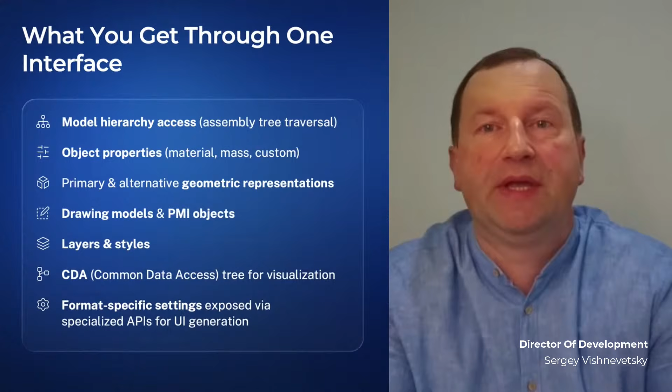Since Common API is designed for rapid solution development, even the list of supported formats and file extensions is exposed through a dedicated class. This allows creating a file open dialog with code. What you get through one interface: across different formats, it gives you model hierarchy access, object properties, primary and alternative geometric representation, drawing models and PMI objects, layers and styles, format-specific settings, exposed via specialized APIs suitable for UI generation.

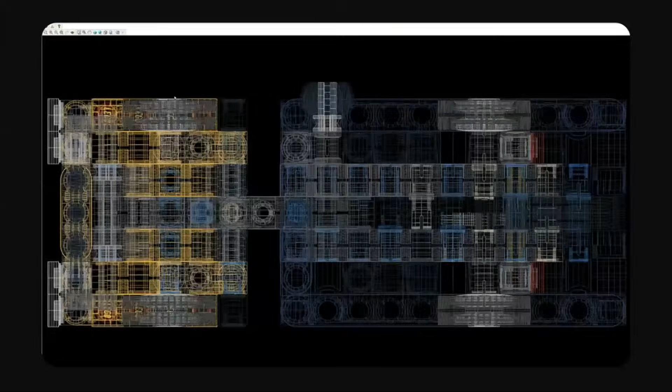Now let's move to a demo where we'll open multiple formats in the ODA example application. In this video, we demonstrate the capabilities of our unified MCAD Common API, which acts as a wrapper for different native SDKs and enables seamless work with a wide range of formats within a single environment. First, we loaded a STEP file powered by ODA SDK. Now we see an IGES model based on the IGES SDK and wrapped with the same MCAD Common API class.

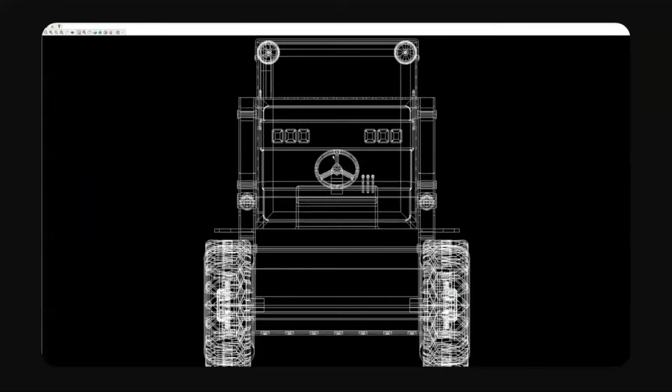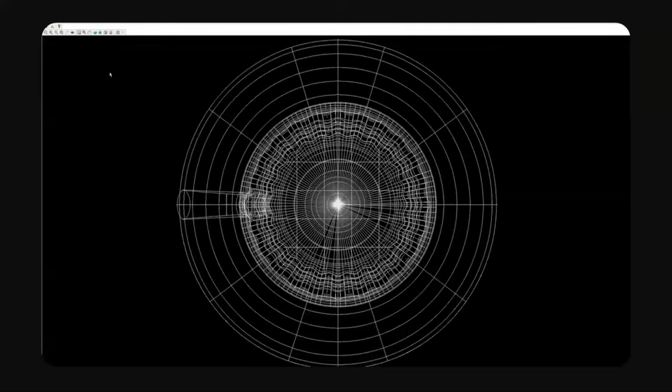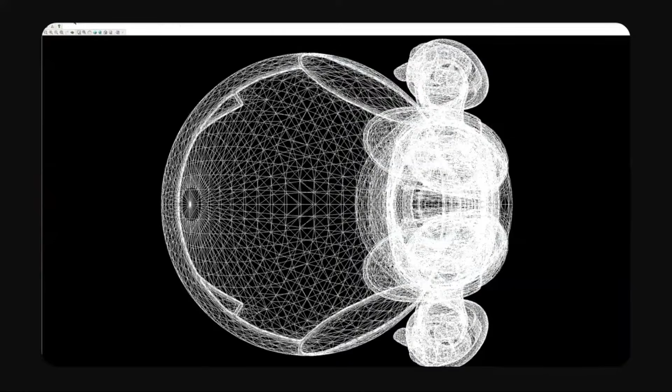For this format, the hierarchy is more detailed. In addition to the mesh 3D model, we see PMI visualization. Next is the JT format, a binary format from Siemens. We are also going to see here the 3DM, the STL, a set of formats that are supported natively but via MCAD Common API. This sample application is available in the MCAD Common API release package. In addition, integration with Visualize SDK is supported through the MCAD to Visualize module, which is also provided as an example.

Another principle is native API for every format. This is the architectural principle that sets us apart from competitors. We do not force data into a single intermediate format. Each format lives in its own native database. A SolidWorks file stays as a SolidWorks database, Inventor as an Inventor database. This preserves the full accuracy of the original data: geometry, topology, parametrics. Each format-specific API exposes everything that exists in the native data.

SolidWorks configurations, display states, sheet metal, design tables, cut lists. Inventor document properties, assembly constraints, STEP AP242 PMI semantics, supplemental geometry, digital signatures, JT load management, tessellation levels. MCAD Common API provides unified model hierarchy access, object properties, primary and alternative geometric representation, drawing models, and PMI objects, layers and styles. Format-specific settings are exposed via specialized APIs suitable for UI generation. Common API is for breadth when you need one code for all formats. Native API is for depth when you need native-level control over one format. You choose what fits your task.

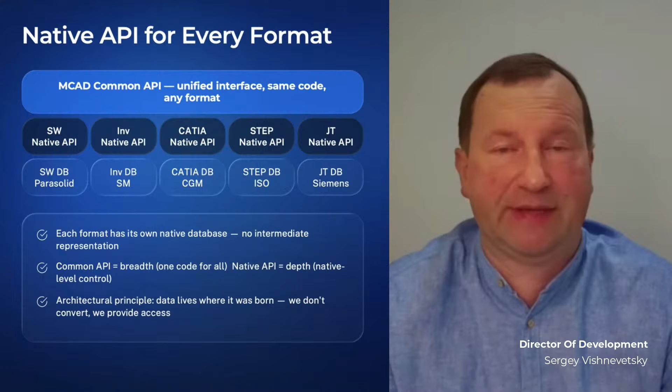Next one. A separate highlight is support for the external 3DM format based on the OpenNURBS Rhino library, integrated into MCAD Common API. This is our first experience integrating a non-ODA format, and it has proven successful. The format works fully through the Common API: model hierarchy, object properties, geometry access, and visualization. We can confidently say MCAD Common API is ready for virtually any MCAD mechanical CAD format.

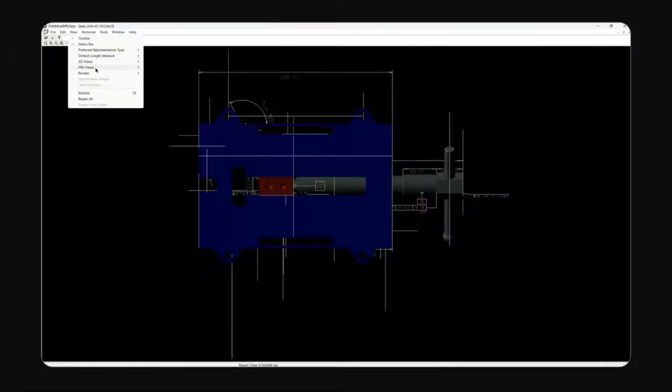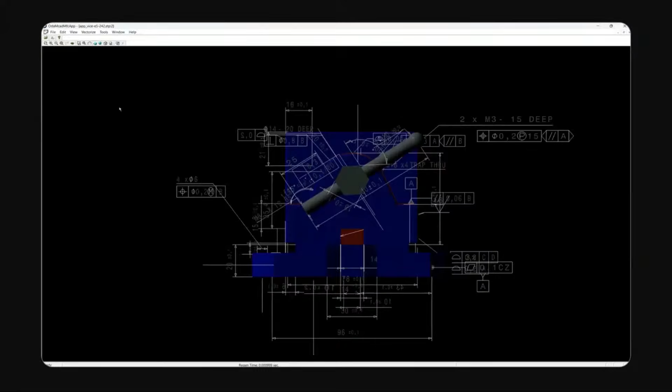Now we are moving to a really small demo where we open the STEP file and show the different views we can see here, and we are manipulating them via MCAD Common API, and we can see different views, and the files contain PMI. PMI is also supported via Common API.

Let's move to the next block. It's our SolidWorks support. SolidWorks SDK provides full native read and write access to SolidWorks parts, assemblies, and drawings. It's a production-ready library for data migration, custom viewers, and editing workflows. You can not only read, but also write back changes, update properties, relink assemblies, modify configurations, and save valid SolidWorks files. The key idea: you fully control the data layer on your own infrastructure.

We support SolidWorks from 2011 up to 2025 in one API. All geometry is native Parasolid BREP and can be extracted directly.

The SDK covers the full SolidWorks data stack across 10 core capability areas. First, we handle one foundational data layer. Our file input-output supports all three primary document types with stream-based processing for high performance. Beyond basic reading, you have deep access to configurations and the ability to perform operations on custom properties at every level. For structural data, the SDK enables complex assembly management, allowing you to traverse or link components dynamically.

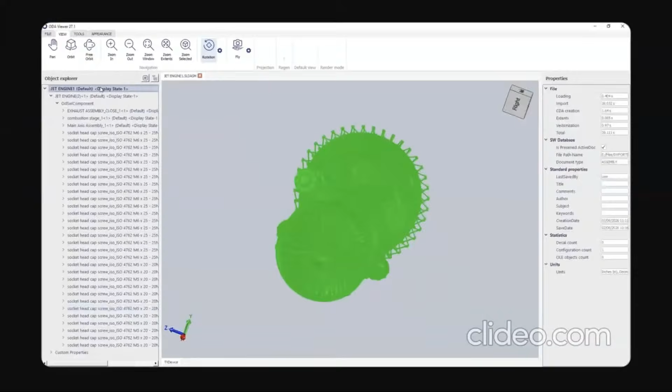For sheet metal workflows, we provide deep access to cut lists and properties: thickness, bend radius, K factor, materials, quantities, and dimensions. Everything needed for downstream manufacturing and ERP integration. Now let's move to our next demo. It's a complex turbine assembly. Let's look at this live demonstration of our SDK handling a complex turbine assembly.

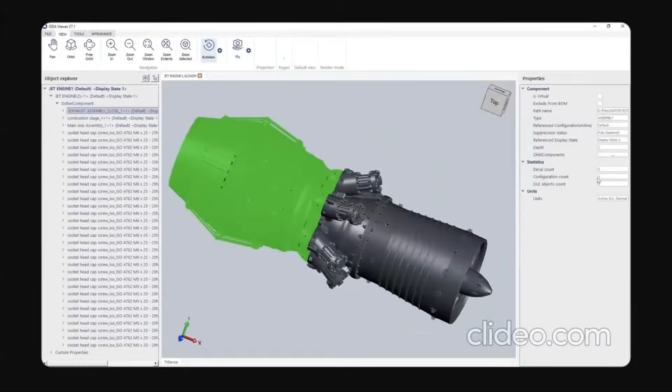As we navigate this 3D model, notice how the common data access tree on the left instantly indexes every component, subassembly and individual bolt. By selecting a component like the rear casing, the system immediately exposes its metadata, including file paths, creation dates, and unit systems directly from the underlying database.

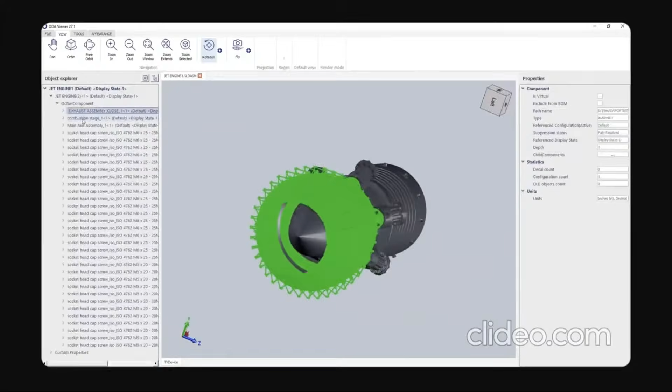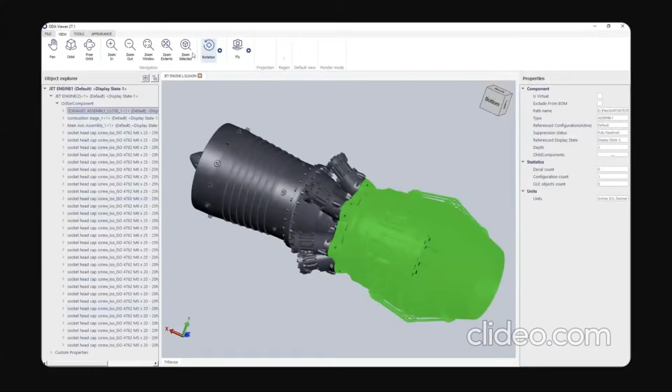You can see here as we toggle components between resolved and suppressed to isolate specific internal geometry for inspection. Observe the click-to-select synchronization. Selecting a part in the 3D view highlights its corresponding entry in the hierarchy. Even within deeply nested subassemblies, the SDK maintains full 4x4 transformation accuracy, ensuring every component is positioned precisely as intended in the original design.

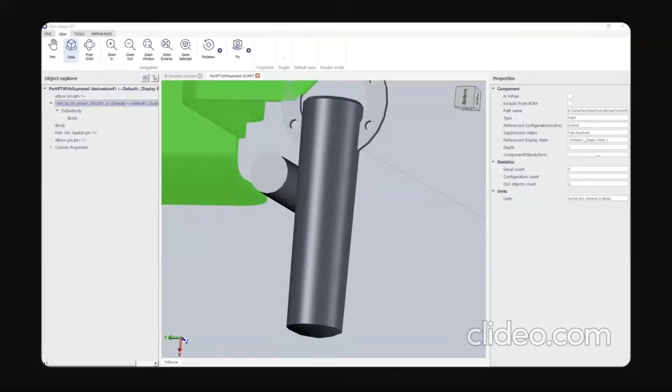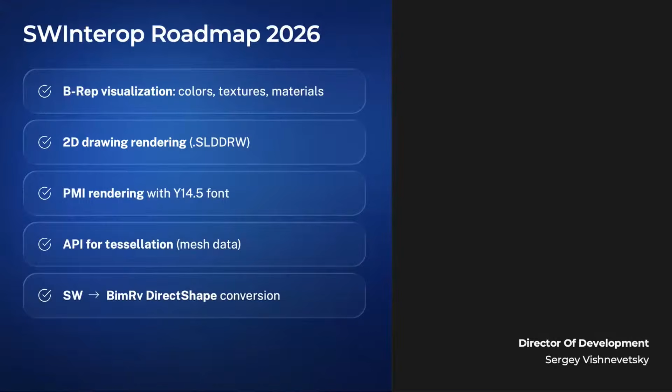Well, looking ahead, our 2026 roadmap is focused on deepening visual fidelity and expanding cross-platform interoperability. We are introducing full API access and rendering for BREP entities that includes support for colors, textures, and materials, ensuring the output matches the original design intent.

Future updates will include dedicated rendering for 2D drawing files and optional rendering of PMI symbols using the industry standard ASME Y14.5 font. To support high-performance graphics workflows, we are adding API access for tessellation mesh data.

The next SDK is Interop SDK that provides native access to Autodesk Inventor files. Currently, it supports reading Inventor file formats from 2022 up to 2026 versions, both for parts and assemblies and for drawings. The public API allows you to extract as-is 3D data from part files, get access to annotations, display lists, and standard and custom document properties. Visualization support is based on our ODA Visualize SDK.

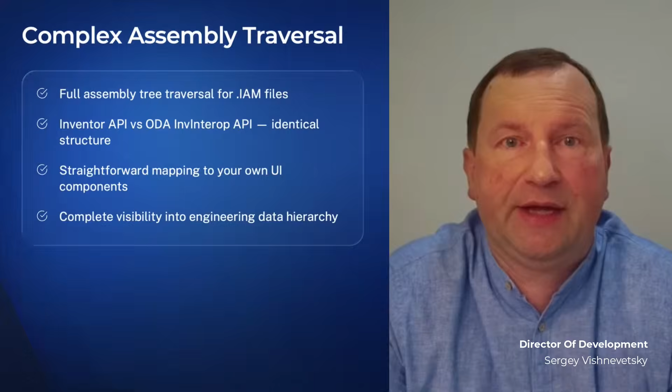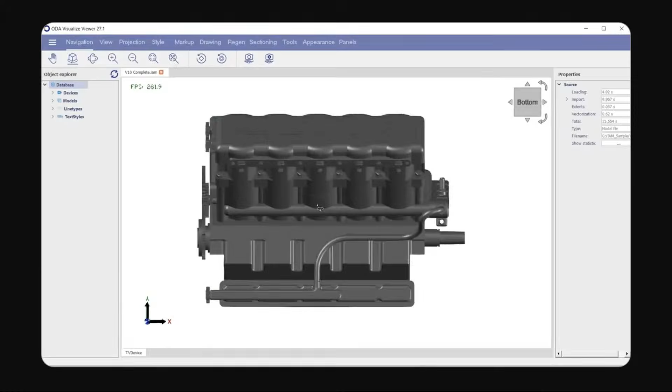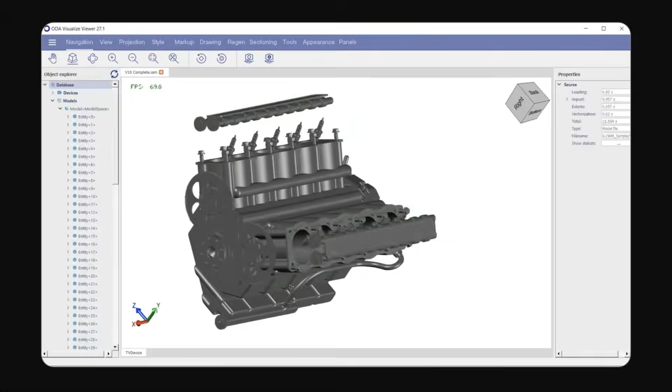Well, now let's move to the next demo. In this video you can see the V10 engine assembly file opened in the Visualize viewer. This assembly file consists of part files and other assembly files. In our sample application, in our Visualize viewer, you can see selection of different parts, isolation of different parts, and all abilities that we provide to work with Inventor.

In our next sample application named Inventor Document Properties, you can see the list of properties including material and mass of the part, last saved by, last saved date properties of the file, and others.

Well, our roadmap for this year for Inventor Interop includes visualization support for 2D IDW files, improvement in the public API for annotations, visualization improvements, extending the public API to traverse object collections and get properties, and unified CAD API integration.

Now let's move to the next block where we cover vendor-governed open formats. The first one is Siemens JT. For lightweight visualization standards, we support the JT exchange format developed by Siemens. We provide visualization of both 3D and 2D geometry. Recent versions added support for selected PMI types and text rendering.

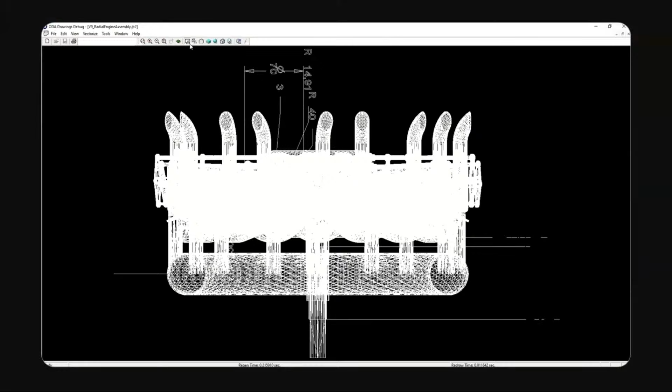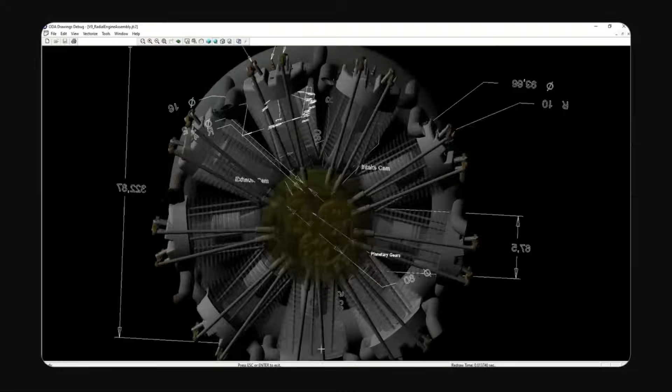Now we have a small demo application that illustrates JT visualization and PMI rendering for JT file. It's our debug application that uses our common Visualize SDK, and we see here both 3D data and PMI from JT file.

The next block that we have is the block of open standards. And the main one is definitely STEP, the industry exchange standard. Over time, our ODA STEP SDK has evolved into a mature and well-proven library used by our customers in their own software products. During several years of development, we have implemented a feature set sufficient to support STEP in a wide range of practical scenarios.

We continue to add new capabilities introduced into STEP through the activities of PDES as we actively participate in CAx implementers forum and closely follow all updates to the format. Our SDK supports all application protocol schemas, including AP 242, 214, including the recent 4th edition.

We support all currently known geometric and topological entities defined in ISO standard and related standards. At member request, support for signature section was added, enabling generation and validation of digital signatures for STEP files. A separate highlight is PMI access through Common Data Access Interface, a feature appreciated by several customers. This enables visualization of PMI information.

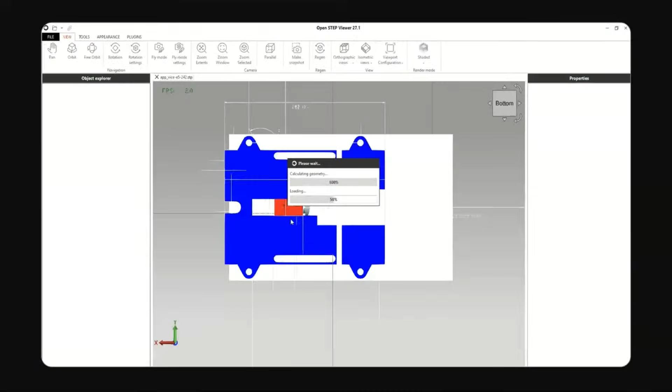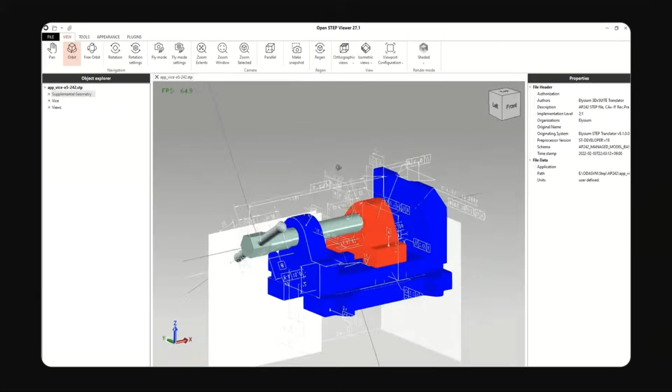This demo shows STEP visualization and PMI access. We provide visualization of product manufacturing information objects, including access to their semantic context and geometric dimension and tolerancing symbol, including on the top of ISO standard, as an additional capability for our users. Supplemental geometry is supported as well. Feature highlighting such as holes or fillets, annotation planes, axis lines, etc.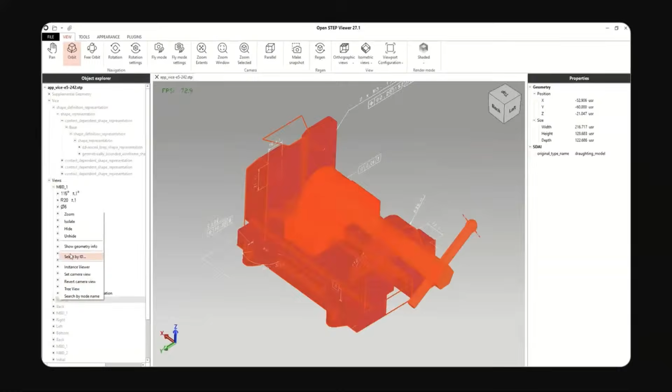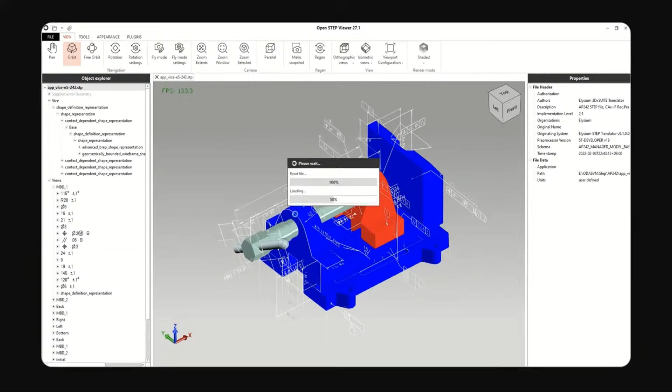We provide access to the model, assembly object tree, and object properties through the CDA tree and CDA properties. Many capabilities of STEP SDK form the foundation for new tools and features in Open STEP Viewer, which is released on a monthly basis. Recent versions introduced usability improvements for our end-user product, enabling work with STEP files at multiple levels, both for developers implementing STEP support in their application and for end users performing direct analysis of STEP models.

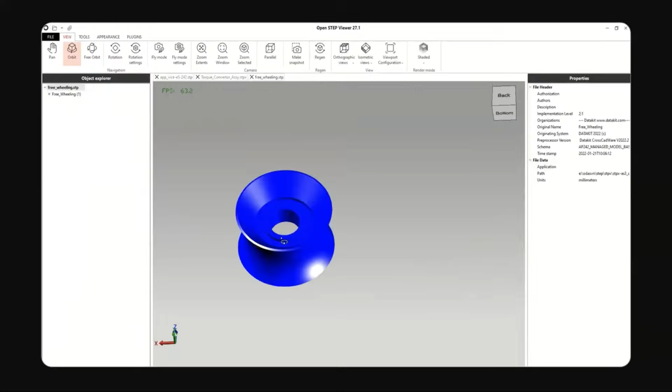I think now we can move to the further slides. And for the products, it's IGES. It's a quite stable format, solid implementation, and despite its age, the IGES neutral format continues to be used in major CAD systems, which is why we added IGES support. Since the format has remained unchanged for many years, the implementation is stable and does not involve evolution.

ODA IGES SDK provides a set of classes representing IGES entities, including full read-write property access and business logic, including 2D and 3D visualization. IGES models can also be created from scratch and saved as IGES file, which we actively use in IGES to DWG converter. A recent addition includes support for constructive solid geometry with Boolean operations and support for block insertions in the IGES form.

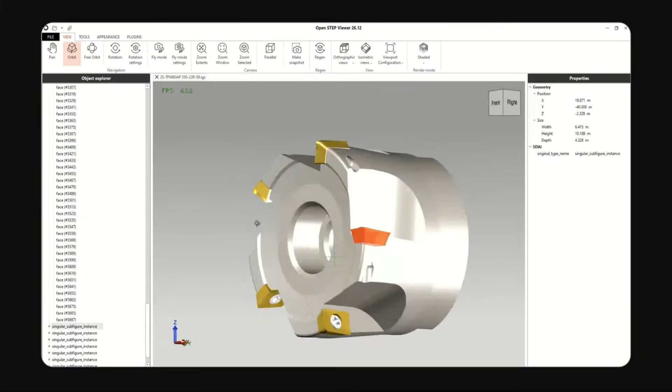Now we can move again to the demo, a small demo where we open IGES file in Open STEP Viewer, visualization of 2D and 3D geometry. IGES loading here is supported, and we can see the IGES data provided via common data access interface.

Now we can move to the further. We plan to improve unified PMI conversion to STEP. We are also open to proposals for supporting additional formats, including external ones. JT version 10.6 support is planned along with improved PMI and text rendering.

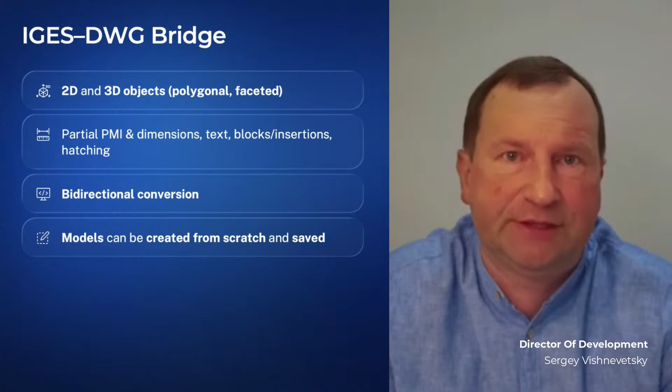And also we implemented the IGES DWG bridge. It includes DWG to IGES conversion modules. Supported entities include 2D and 3D objects, partial PMI and dimensions, text, blocks, hatchings. IGES models can also be created from scratch and saved as IGES models.

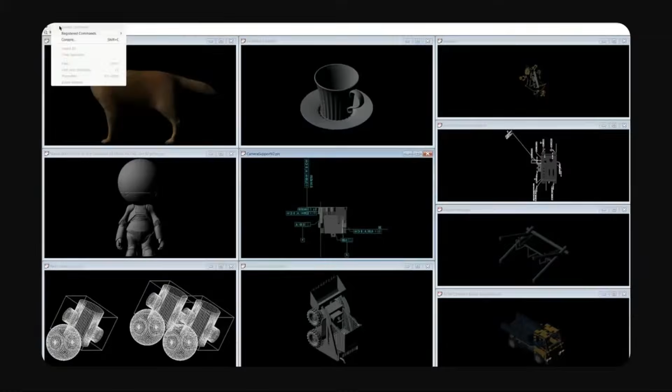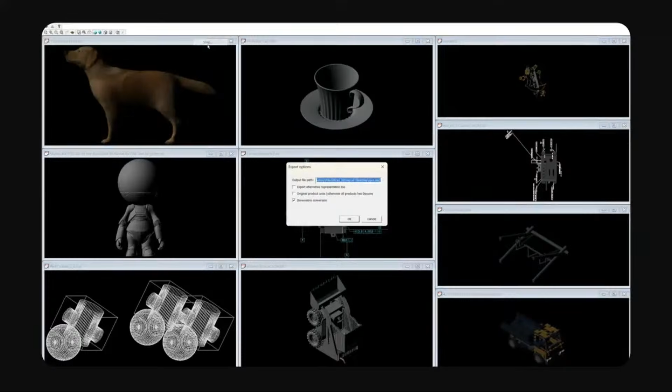And now we switch to a short demo. You see all those formats that we opened with a common CAD API, and this use of the common CAD API allows us to use the same approach for STEP conversion of all these formats, JT, SolidWorks, CATIA, and others, and provide conversion to STEP in a universal way, in the same manner, through the same API.

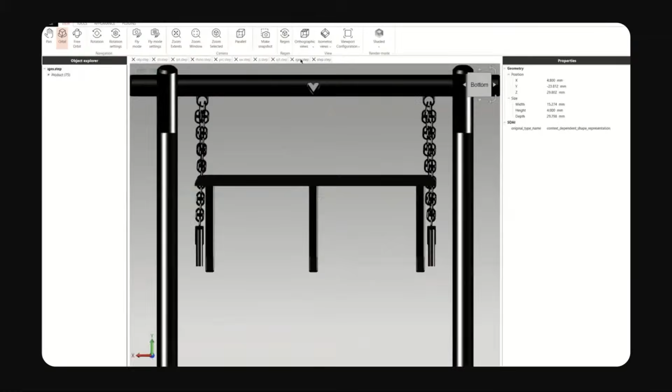Now we see opening of all these files in the OpenStep viewer. So all those formats were converted to STEP via the same single universal interface. I hope it simplifies life of developers. And again, I need to highlight that we talk about the API, not about the common intermediate format. The data are still in their own databases.

Well, let's move to the question, why ODA MCAD? To summarize, our platform stands on three core pillars. Breadth: all major formats, proprietary and open, in one platform. With CATIA, NX, and Creo, the coverage is complete. Depth: not a viewer, full native BREP and PMI for real manufacturing workflows.

Unity: one common API across all formats. Same code everywhere. And when needed, format-specific APIs give you full access to native features. One platform, two levels. You choose the depth.

Highlights for the roadmap of this year. In the second quarter of this year, we are going to provide CATIA beta and API extension for Inventor support. In the third quarter, SolidWorks BIM integration, JT 10.6, and NX and Creo will be in progress. And by the end of this year, we are going to provide support for NX and Creo and CATIA production support.